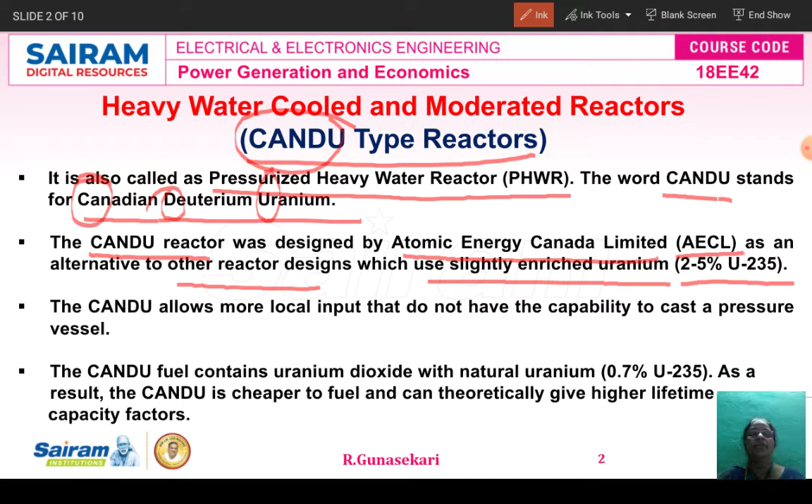The word CANDU stands for Canadian Deuterium Uranium. From Canadian you take CAN, from deuterium you take only D, and from uranium U. So finally CANDU. In the university question paper, some evaluators ask: explain the operation of the CANDU type reactor with a neat sketch. That means the heavy water cooled and moderated reactor. Don't confuse it, both are the same. Depending upon the question paper setter, they use any one name. So here there are three names: heavy water cooled and moderated reactor, CANDU type reactor, and pressurized heavy water reactor.

CANDU allows more local input for countries which do not have the capability to cast a pressure vessel. CANDU fuel contains uranium dioxide with natural uranium, that is 0.7% uranium-235. The CANDU reactor is cheaper to fuel and can theoretically give higher lifetime capacity factors. These are the advantages of CANDU type reactors.

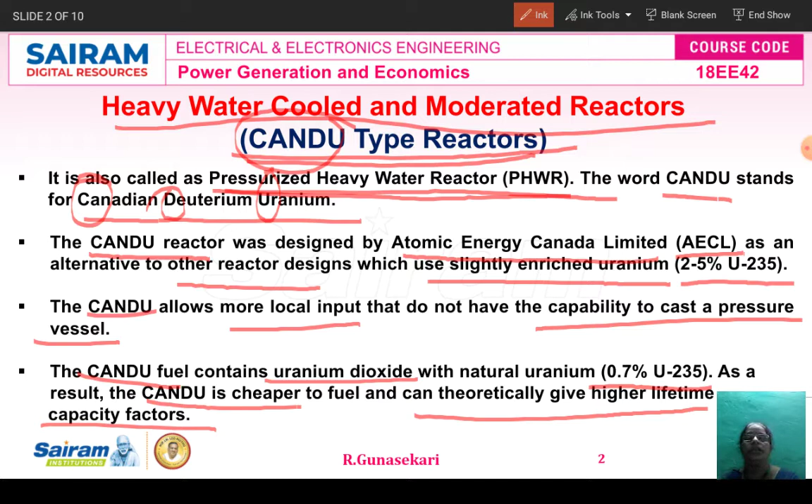The CANDU design consists of a horizontal calandria, that is the vessel, which has the tubes for the fuel rods and cooling water. Heavy water is used as the cooling water. Heavy water is represented by D2O. D2O means deuterium oxide. The heavy water also acts as a moderator to slow down the neutrons.

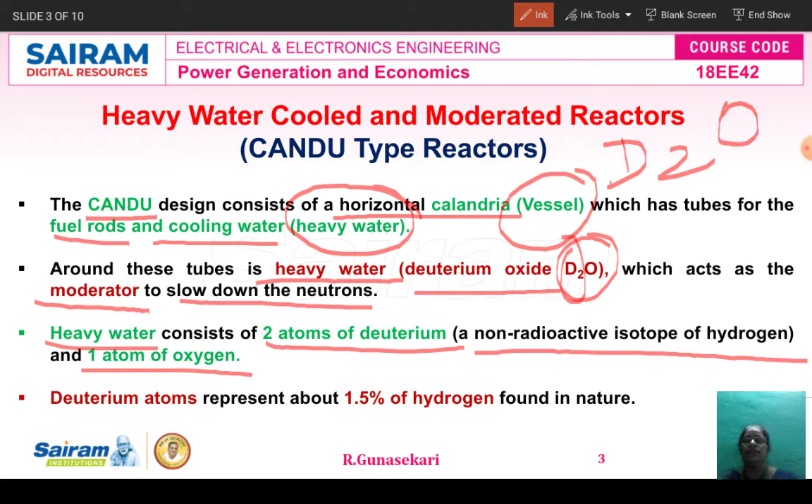Heavy water consists of two atoms of deuterium, that's why D2. Deuterium is a non-radioactive isotope of hydrogen. O is nothing but one atom of oxygen. That's why it is represented as D2O. Deuterium atoms are present in about 1.5% of the hydrogen found in nature.

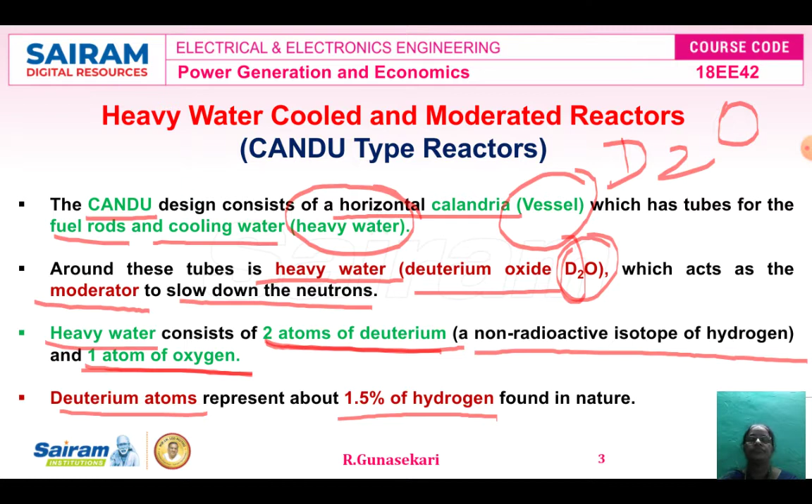Continuing with CANDU type reactors, deuterium is more efficient. That is, D2O is a better moderator than light water, which allows natural uranium to be used as fuel in this type of reactor. The deuterium separation adds to the initial capital cost, which over the plant lifetime is offset by the lower natural uranium fuel cost. This is another merit of CANDU type reactors.

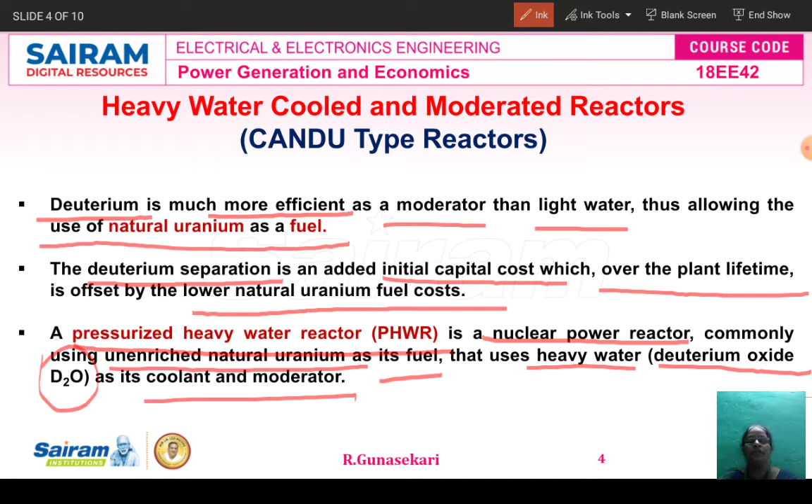The pressurized heavy water reactor is nothing but the CANDU type reactor. It is a nuclear power reactor which is commonly used. Unenriched natural uranium is used as fuel. Heavy water, that is deuterium oxide D2O, is used as a coolant as well as a moderator. The heavy water coolant is kept under pressure, which allows it to be heated to a higher temperature without boiling. This is very, very important. The pressure is increased with the help of a pressurizer.

Heavy water is more expensive than ordinary light water. It greatly enhances neutron economy, allowing the reactor to operate without fuel enrichment facilities and generally enhancing the ability of the reactor to efficiently make use of alternate fuel cycles. This type of reactor is used in countries where enriched uranium is not available. Under such situations, we have to use CANDU type reactors.

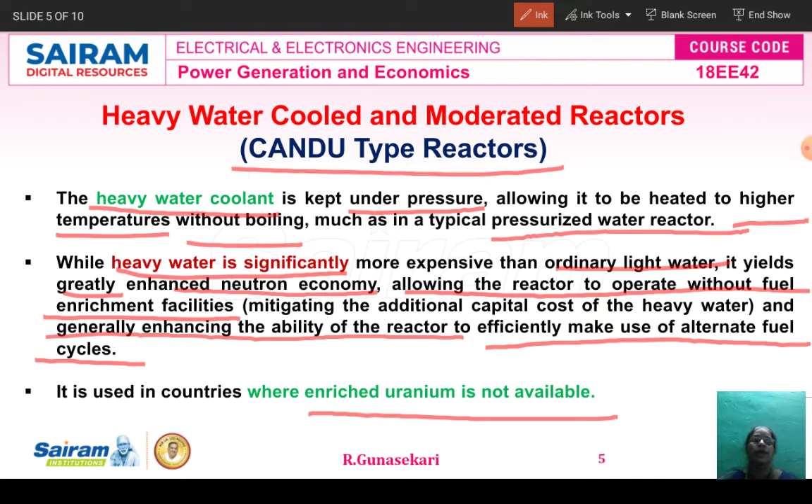The CANDU type reactor consists of two circuits: one is the primary circuit, another one is the secondary circuit, similar to the pressurized water reactor, abbreviated PWR. The coolant heavy water is circulated in the primary circuit and steam is produced in the secondary circuit, with heat transferred in the heat exchanger. The reactor coolant pump circulates the heavy water through the reactor to the steam generator in a closed loop. The moderator heavy water system, where D2O is used as a moderator, has a separate heat exchanger with a circulation system for cooling the moderator.

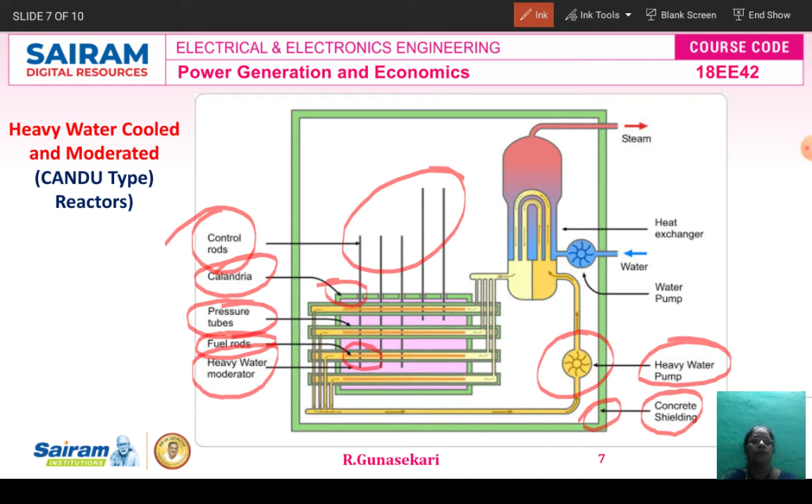The light black color vertical line is called the control rods. The outer square, that means the green box, is called the concrete shielding. This water pump is nothing but the heavy water pump. This is just a water pump only. This is the heat exchanger. This is the steam outlet. This is the water inlet.

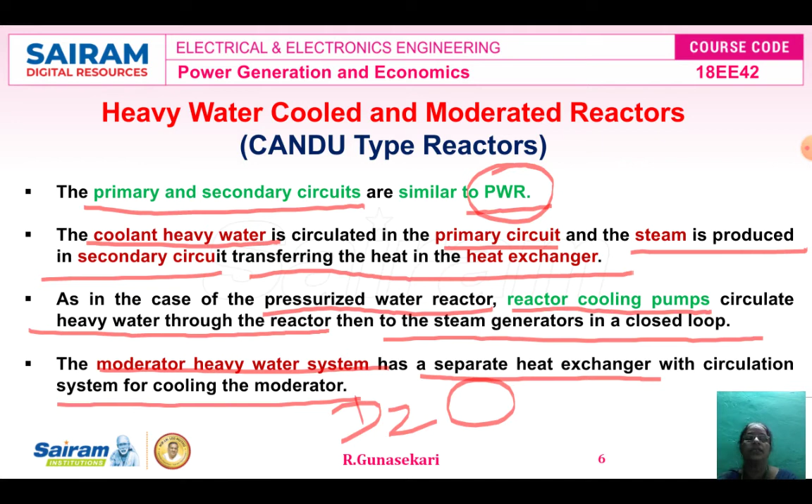We already studied that there are two circuits: the primary circuit as well as the secondary circuit. In the primary circuit, the coolant heavy water is circulated. So this is the coolant water. And then in the secondary circuit, steam is produced. So this is the secondary circuit. Heavy water, this is the primary one.

This steam is used to drive the turbine. The turbine is coupled with the generator. The turbine converts steam energy into mechanical energy. This mechanical energy is used to drive the generator, and the generator generates electrical energy. This is the basic principle of heavy water cooled and moderated type reactors, another name is CANDU type reactors.

Another one is the pressurized heavy water type reactor. It's not pressurized water, it is a pressurized heavy water reactor. Pressurized means we are using high pressure. The steam is heated at high pressure, and the heavy water is used as a moderator, and this is a water reactor. That's why it is also called a pressurized heavy water reactor.

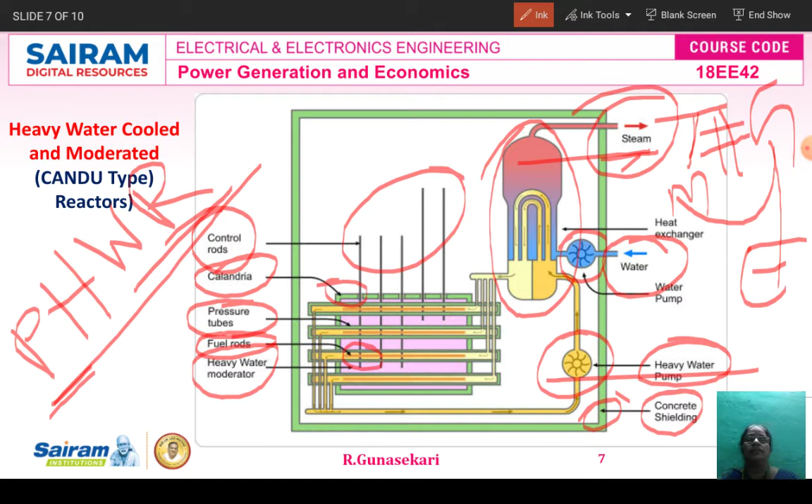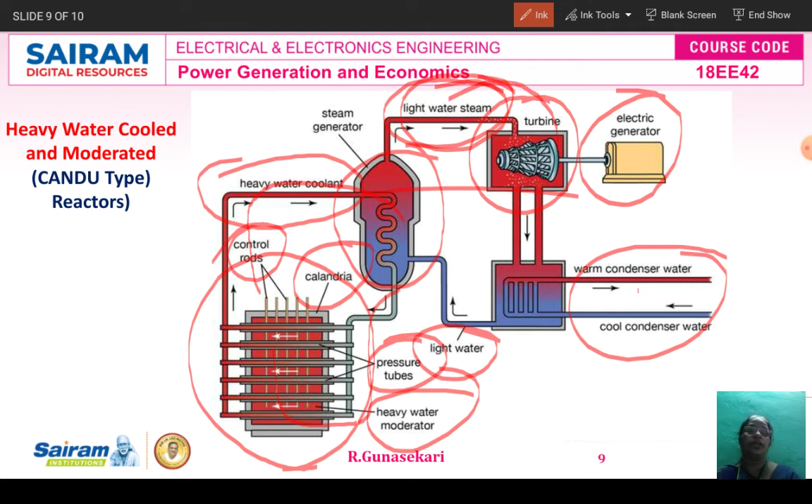From the turbine, the exhausted steam comes to the condenser. The condenser condenses the water. The condensed water is again fed to the heat exchanger. The water comes to the reactor and is converted into steam. That steam comes to the turbine and is used to drive the turbine. The turbine and generator are coupled, so the turbine drives the generator, which produces electricity. You can draw any diagram.

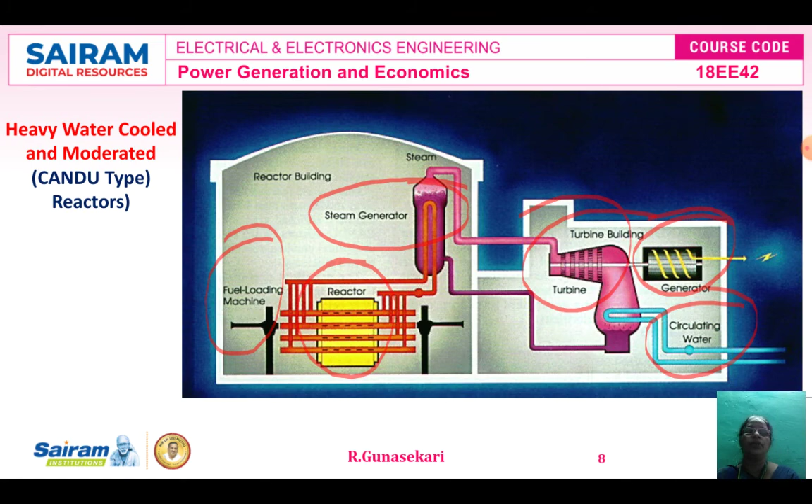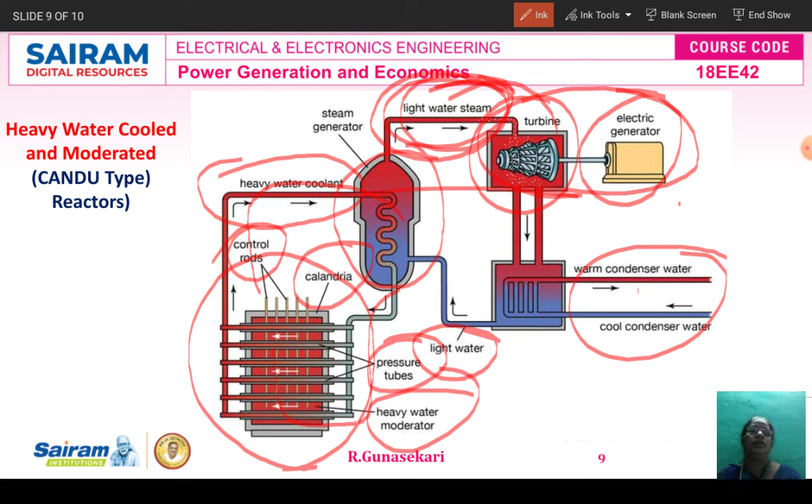Low fuel consumption. No control rods needed. Only a low pressure vessel is used, because the low pressure water steam is used to drive the turbine. So a low pressure vessel is used. It is more effective in slowing down the neutrons, because heavy water is used as a moderator to slow the neutrons, and the moderator is at low temperature. These are the advantages.

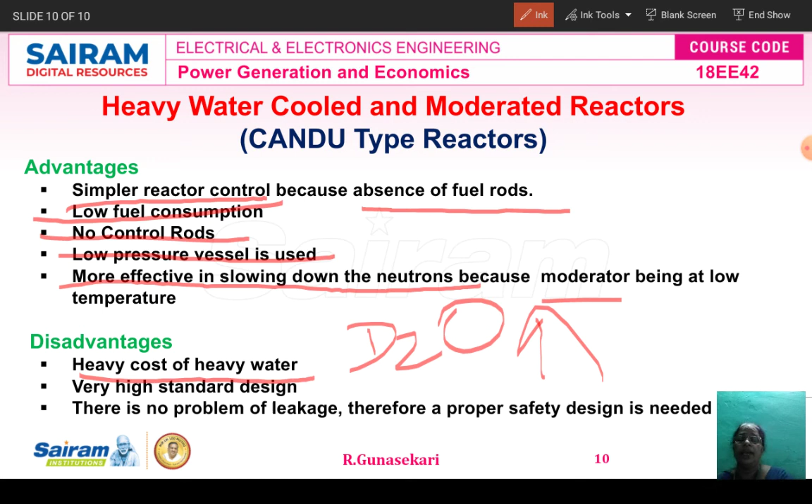The disadvantage is heavy water, D2O, is used as a moderator, so the cost is high. It needs a very high standard design, with primary and secondary circuits, as you already saw in the diagram. Here we never use gas or helium as a coolant or moderator, so there is no problem of leakage, but proper safety design is needed for CANDU type reactors.

Dear students, I hope that in this lecture video you clearly understood what is meant by CANDU type reactors, their other names, the abbreviation of CANDU, the special features of CANDU type reactors compared to other types, the advantages and disadvantages, and the various diagrams I showed so you can easily understand the working of heavy water cooled and moderated reactors.